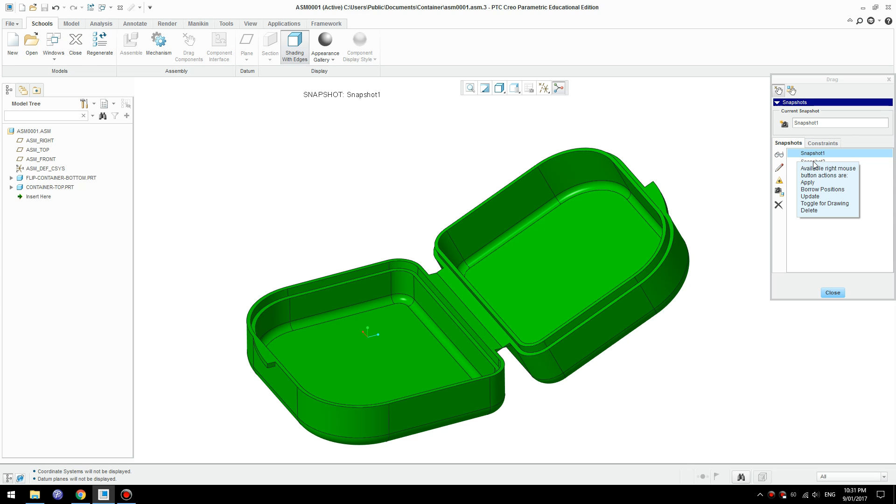Alright, let's go ahead and get started. We'll start with a new part. Let's call it container, and I'm going to use millimeters.

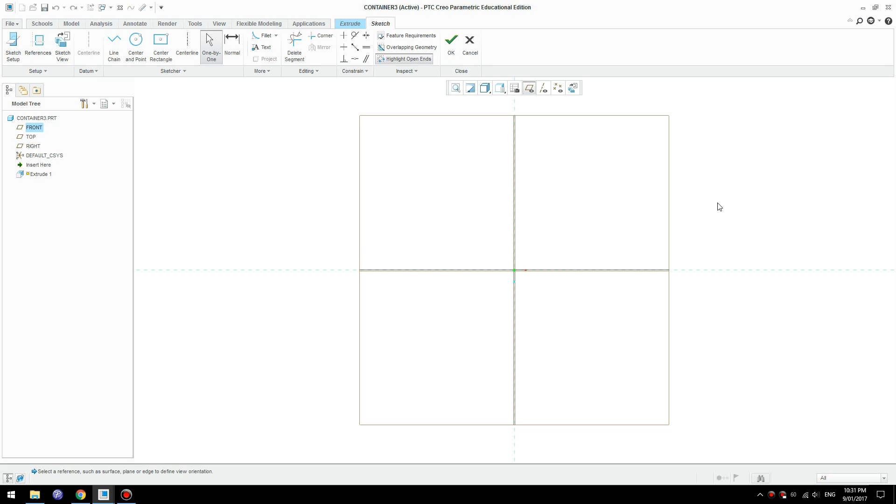Alright, we'll start by creating an extrude. So right click, define the sketch, and click the plane. We're going to draw on the top plane. We're going to start with a rectangle, and press the middle mouse button to apply the rectangle, and I'm gonna make it the width of 120 by 90.

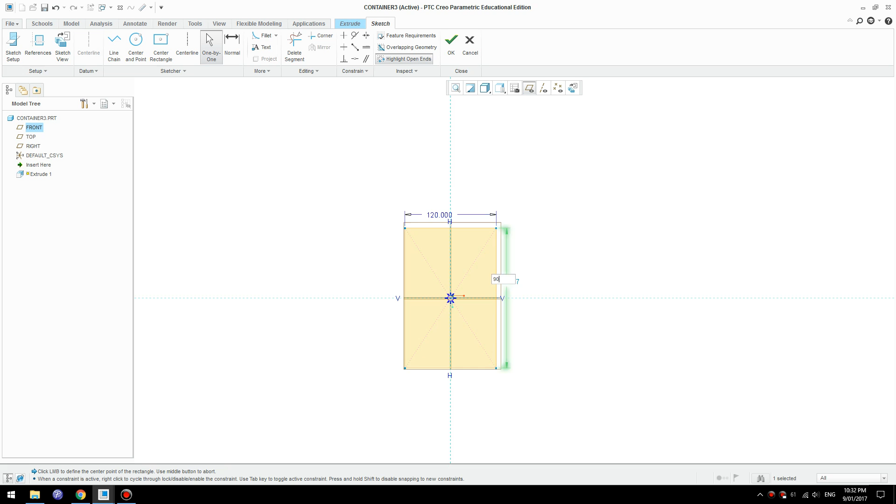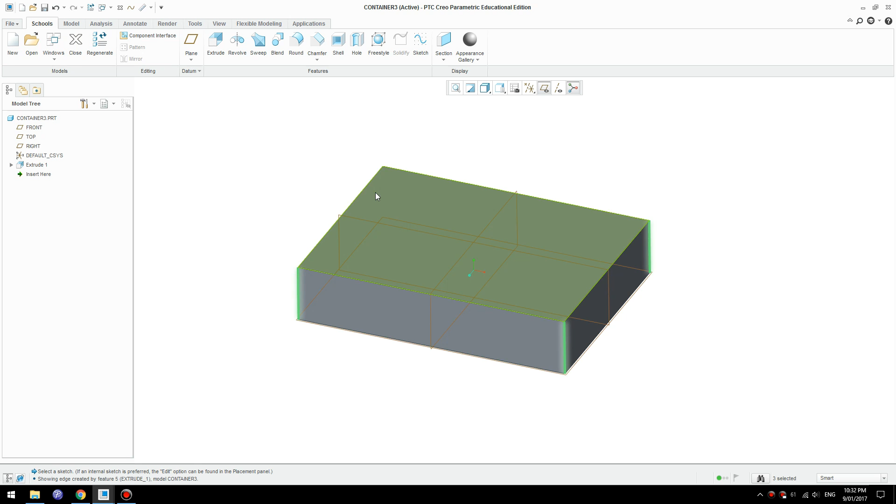And make an extrusion of about 25, and accept that. Alright, we're going to round the four corners. So select the edges, right click, click round, and let's drag these white boxes to round them, and then round the two edges on top and bottom as well.

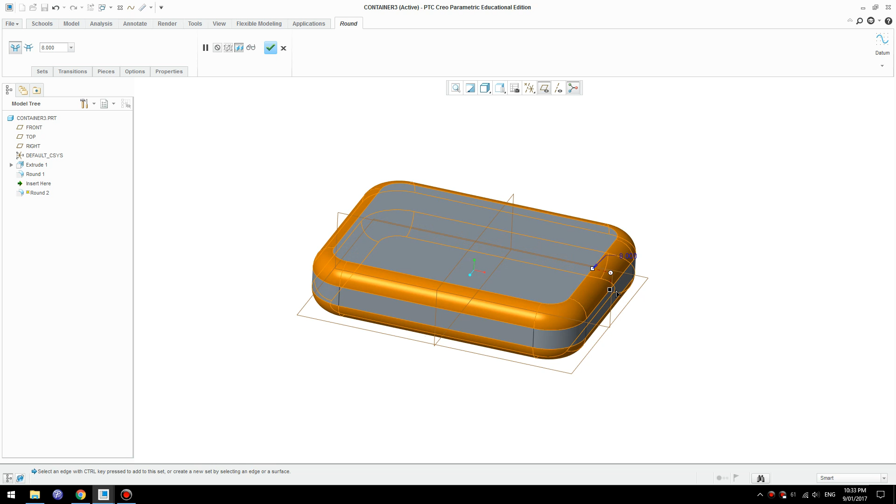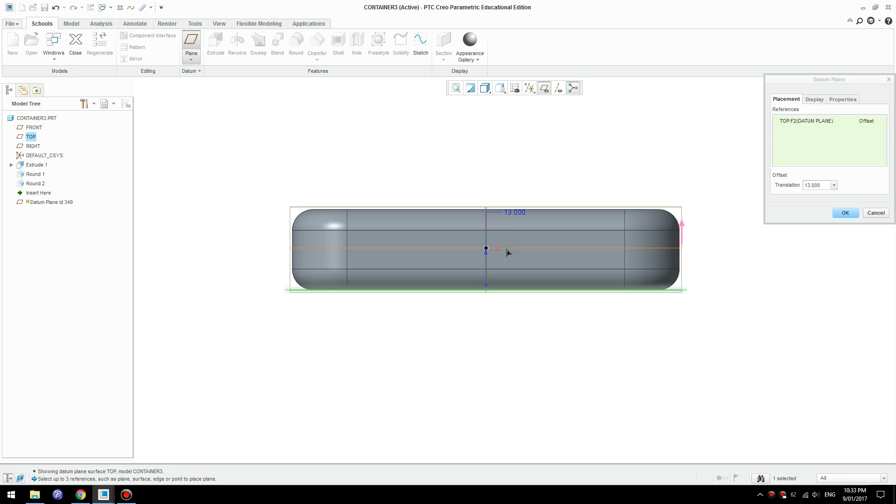Alright, there you go. Alright, we're going to create a middle divider. We're going to create a new plane from the bottom and move it to the middle. I'm going to switch to front view, and we know the height is 25, half of 25 is 12.5, and we have a plane in the middle here.

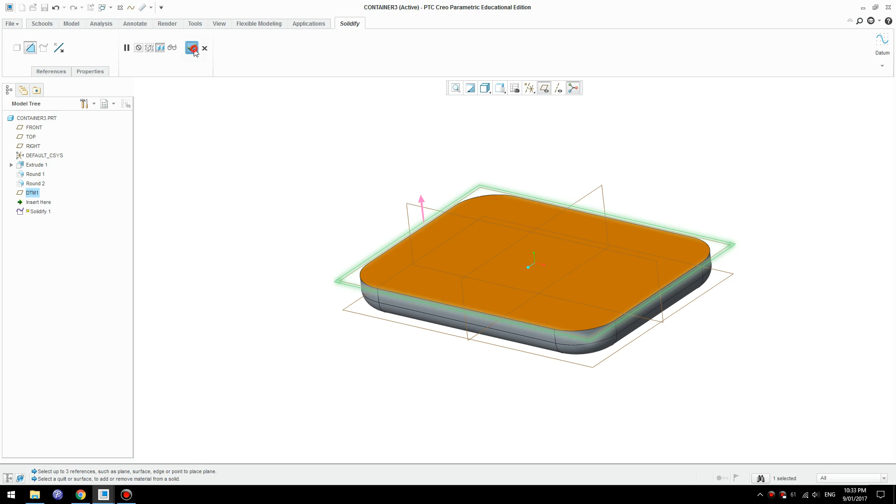And to create a cut here, we can go to model and solidify, and we can switch it. We can create the cut on both sides. Alright, we're going to start by just doing one cut, and I'm going to save this as a main file, then save a copy of the top and the bottom, and save another copy as the top.

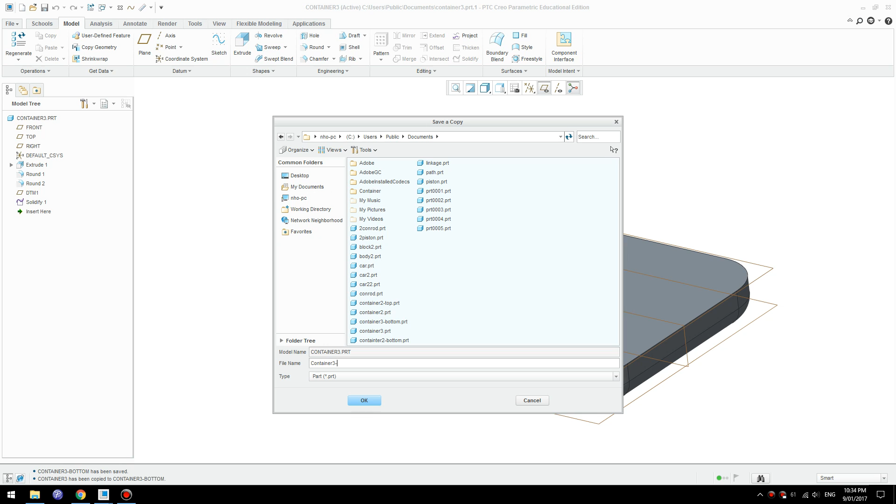Alright, so this is the part file here. It's just the main container file. I'm going to go ahead and open the other two copies that I saved. So open the bottom and open the top.

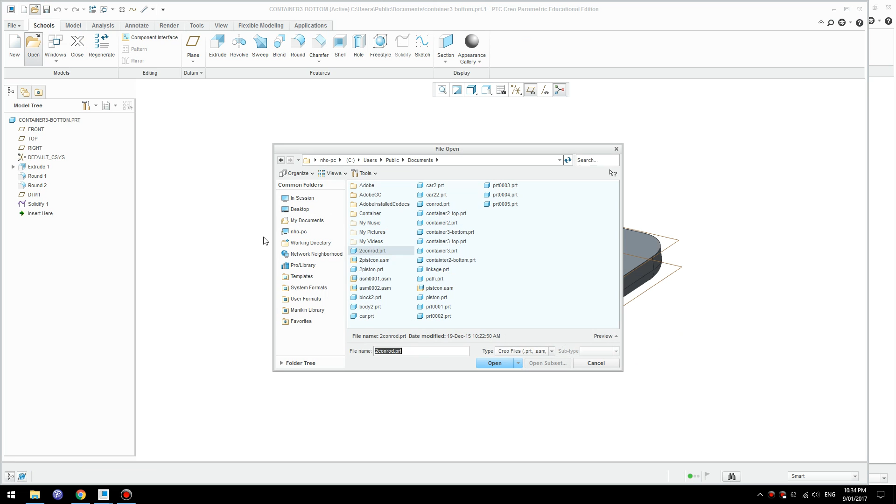Alright, we're just going to add a shell. Let's put a shell on this surface. Let's make the thickness about 2 mil, 2.5 actually. So that's for the top piece.

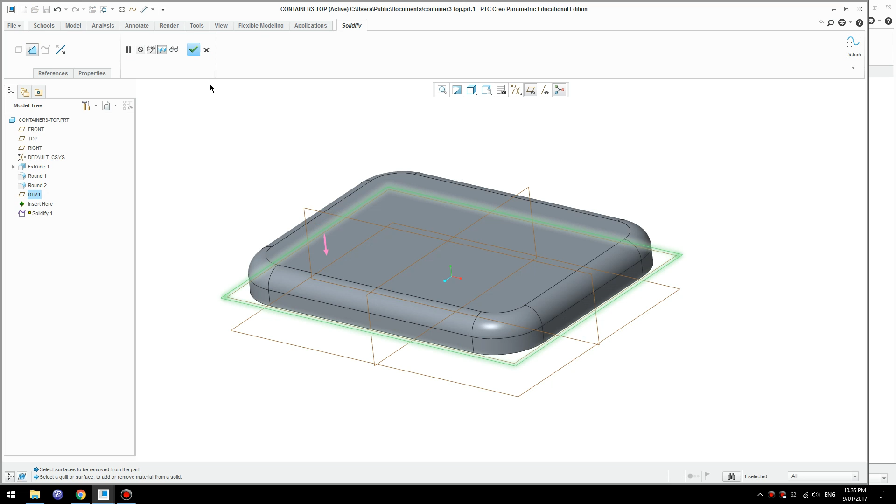Alright, we made a mistake. So this should be the top piece. We flip this to cut the bottom, and then yep, there you go, it shows on the other surface. So we have the top lid here.

And switch to the bottom and add a shell on here. Let's make that 2.5 as well.

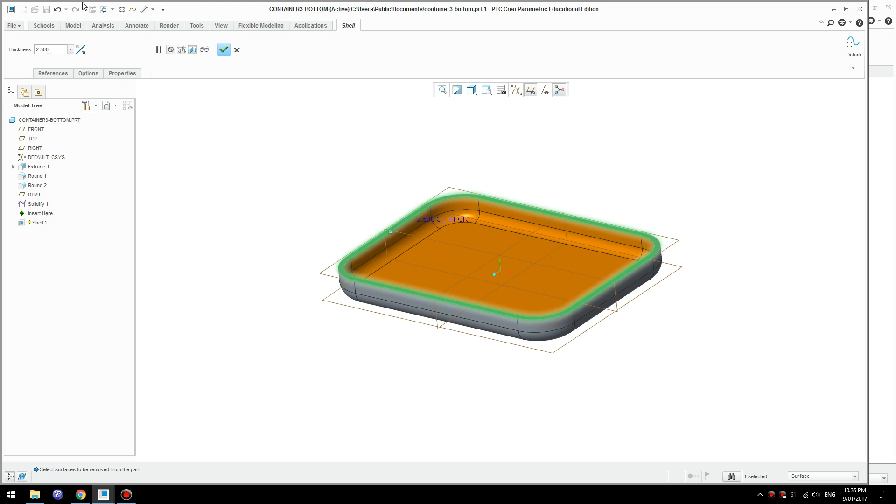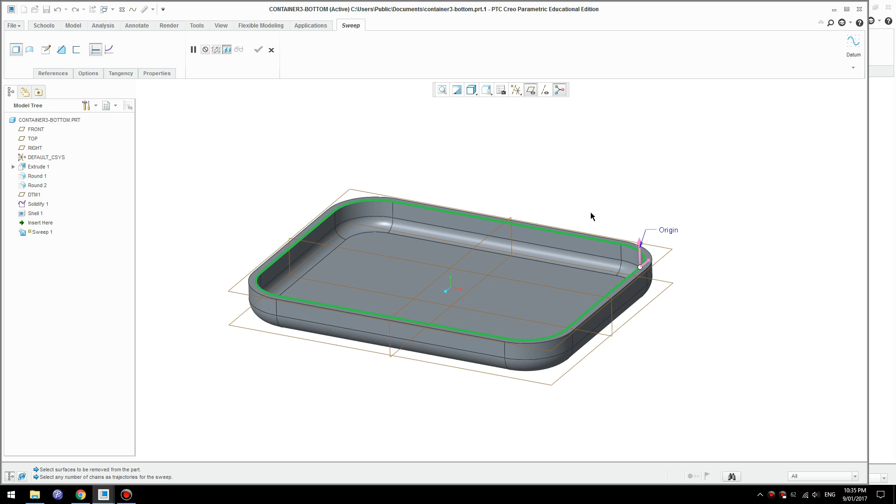Alright, the last step, we're going to create a parting groove on the product, and we're going to go to the model tab, go to sweep. On the sweep tool, we need to select a trajectory. What we can do is tap right click to make it select the whole edge around the product. And then now we can go ahead and create the cross section.

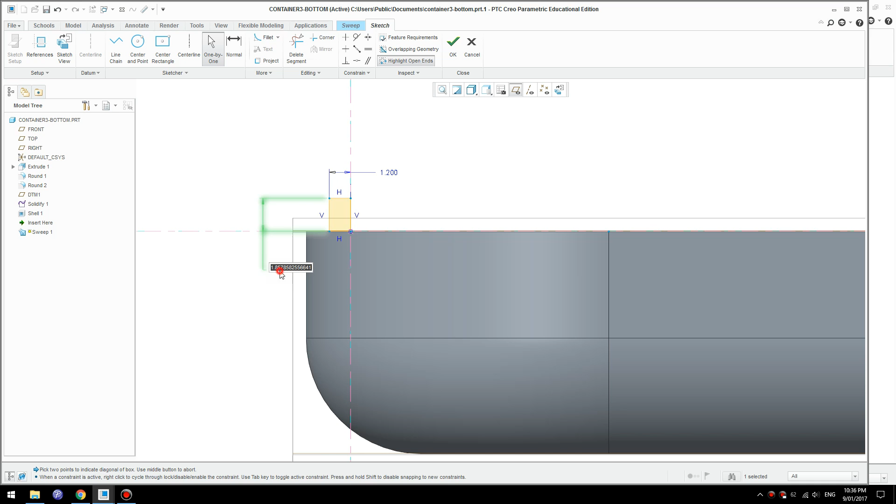And I'm going to draw a rectangle here. Actually, go to rectangle, corner rectangle. Let's draw a rectangle, something like that. And I'm going to make the width of that teeth, that groove, to be a little bit less than half, so it's 1.2, and the height is about 2 millimeters. And the next step, that sweeps around the product, creating the groove.

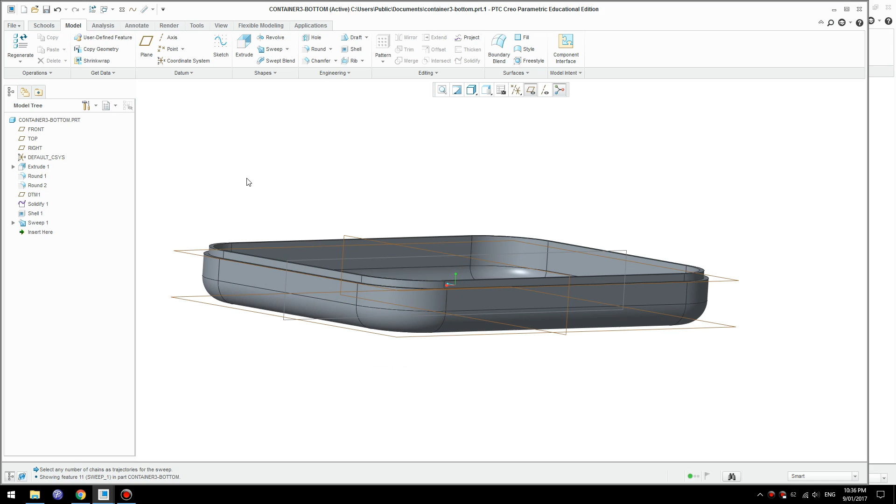So on this side we're adding material, but on the other side we're gonna sweep but make it a cut. We'll do that on the other side now.

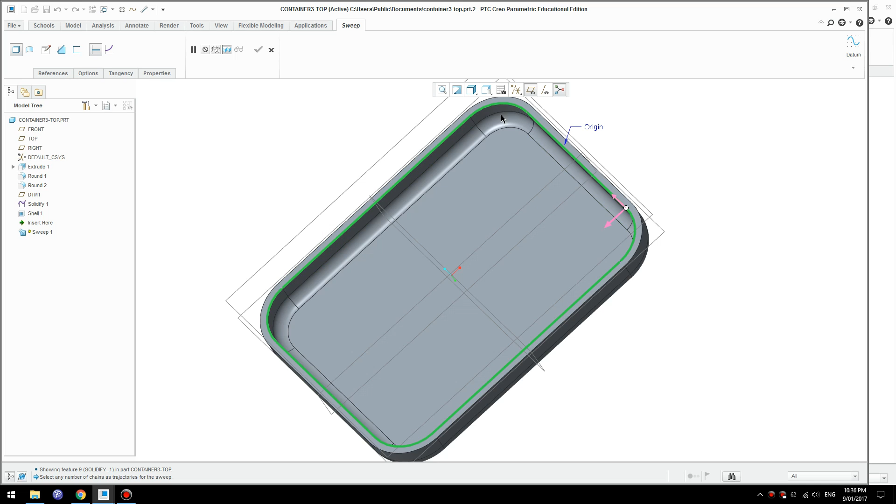Let's go to the top. This time we're gonna do a cut. Let's go model tab, sweep. Tab right click to select the whole trajectory around the product. And I'm gonna go to sketch, find where the cross is, and that's where the beginning of the cross section is. Alright, there you go.

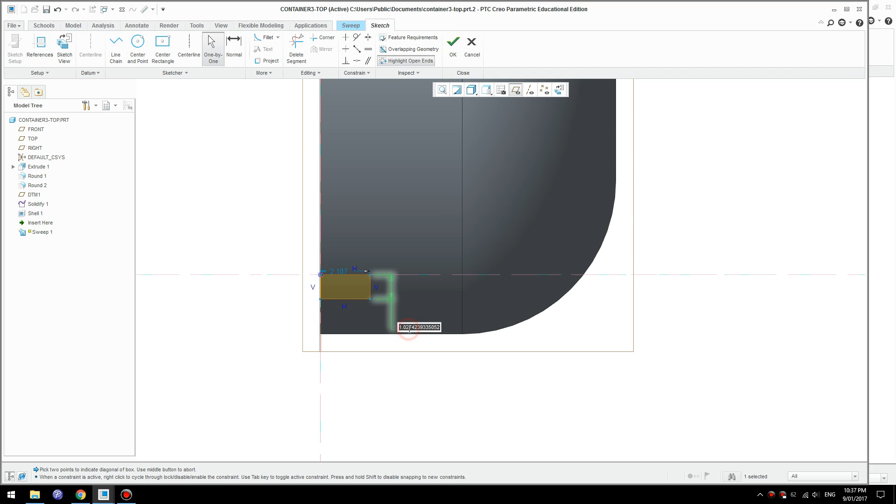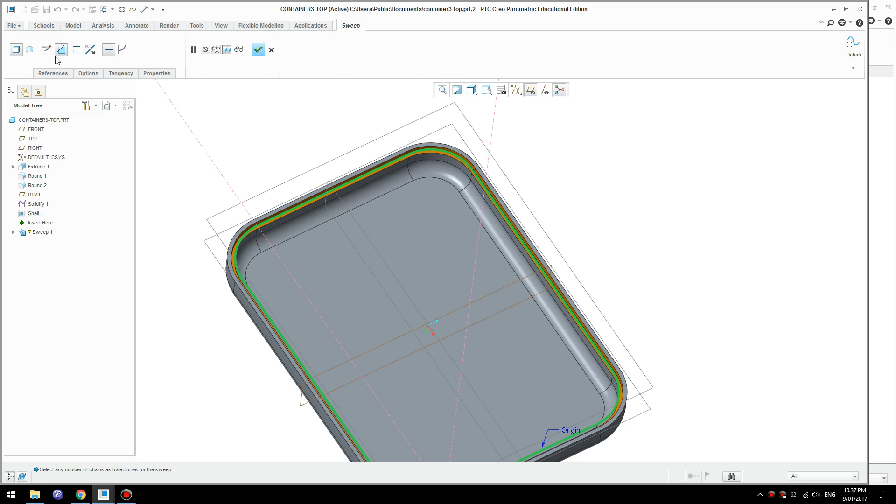Let's make this 1.2. Alright, this time we're going to sweep it around and make sure we select remove material. And actually I'll make this a bit larger, make it 1.3, so there's more gap space.

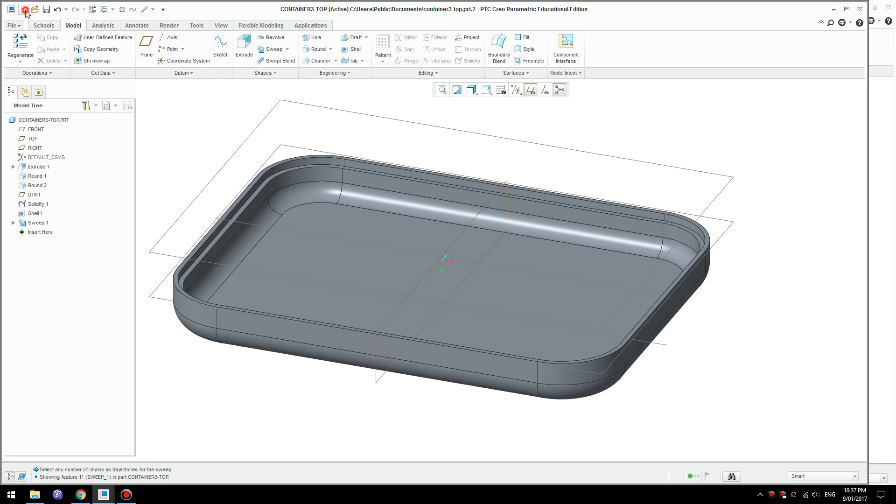Alright, there you go. And next step, we just need to create a little lip and then assemble that together. Alright, I'll just actually assemble it and finish it there. Let's go assembly, assemble, load in the bottom.

I'm just gonna place it in the default in the center and load in the top. Where is the container top, and place it here.

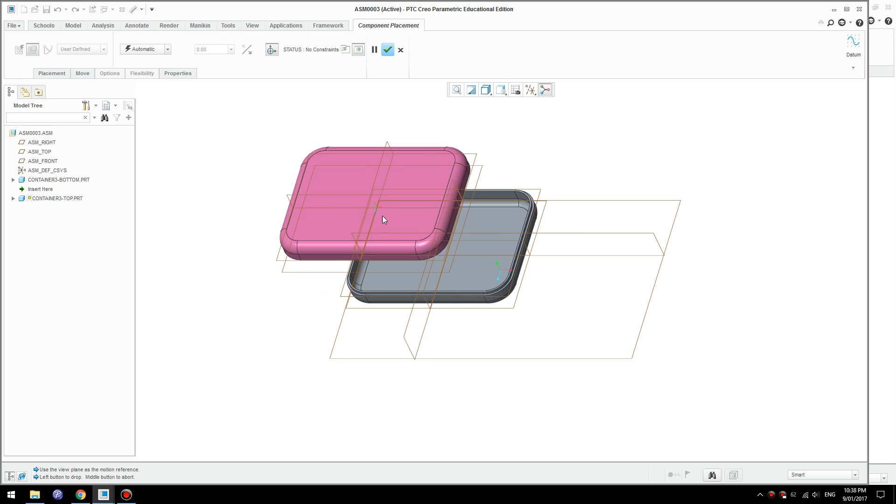Turn on these references and we'll assemble them based on this surface, this and this, and finally this edge and this edge.

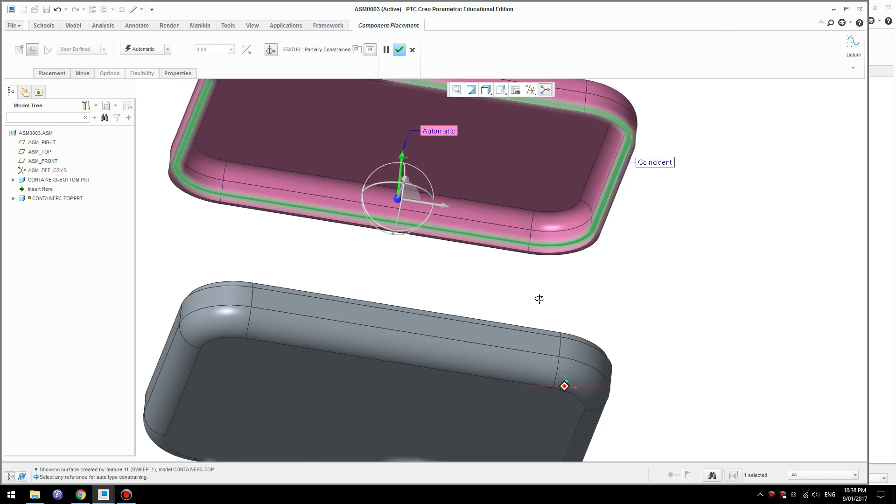And there you go, you can add an offset.

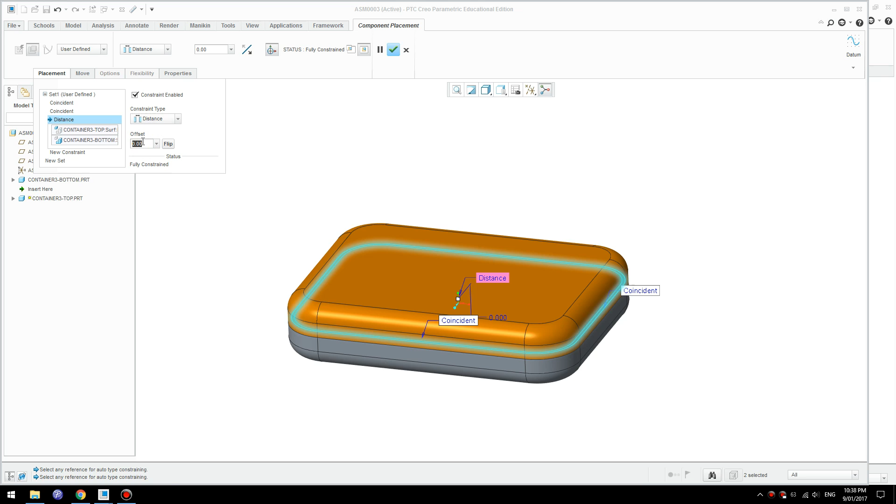Alright, there you go, that's how you create a little container. You might want to add a little lip so you can open it easier, or you can make it so it can be open. You can add a little lip at the beginning there, and also you can make it so it's one piece where it can be folded over.

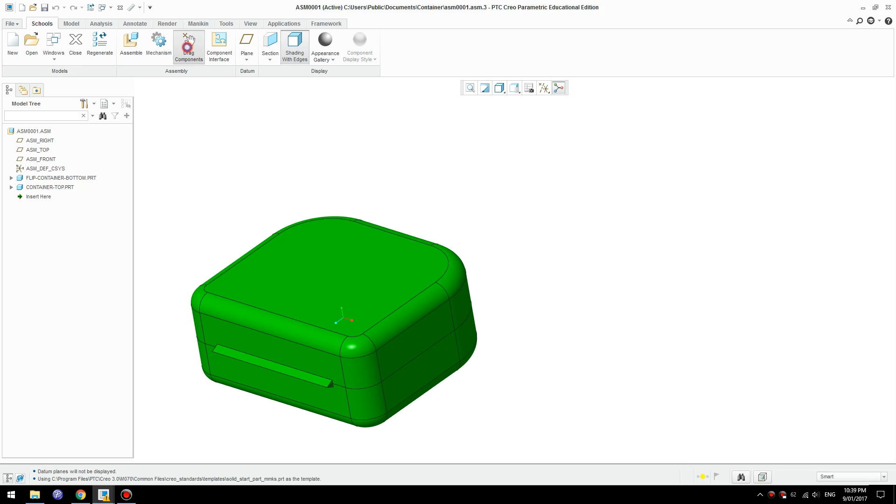So you can make it so it's connected there and it folds out to create a one-piece container part.